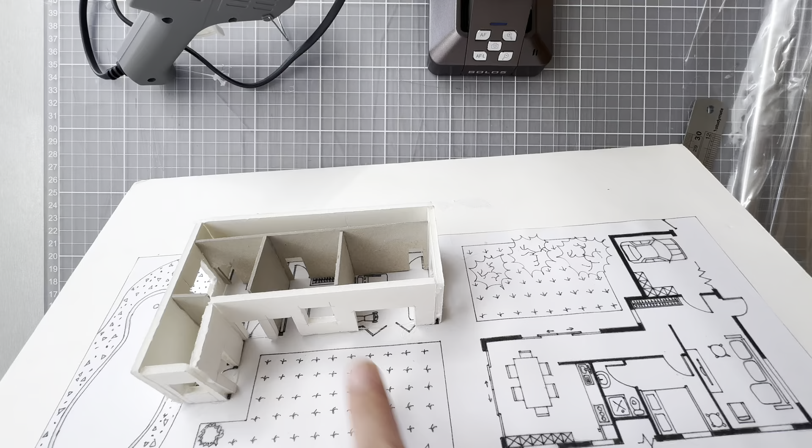This step is called adding details, or more specifically, adding the windows, the window Perspex on here. Let's say a window on it, okay?

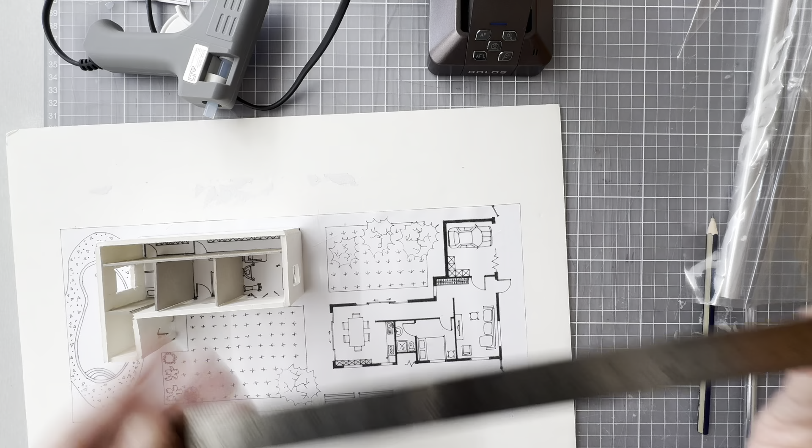The materials you're going to use today are first of all your finished model with the external and internal walls. You need a hot glue gun, make sure you plug it in so it preheats. I'll just lay it down because it cannot stand. You will need a metal ruler, a pencil, a knife, and most importantly, something called Perspex—these transparent pieces of plastic paper.

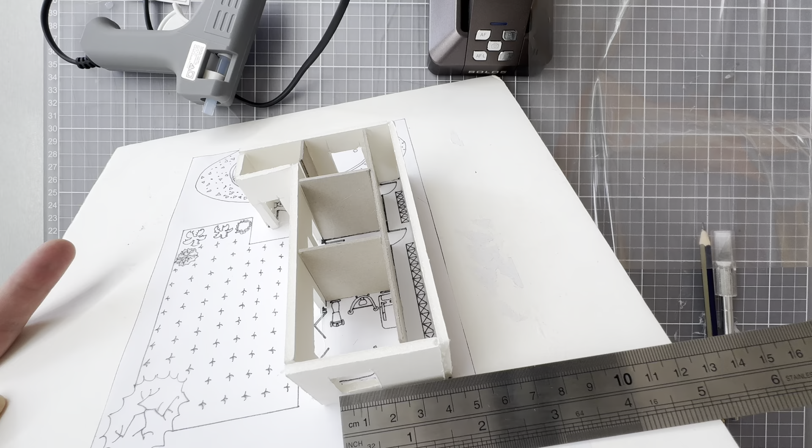First, we're going to measure how big your window is going to be. I'm going to use this window as a guide and measure it. Looks like this is 1.5 centimeters, and for the height, let's figure it out—looks like it's also 1.5.

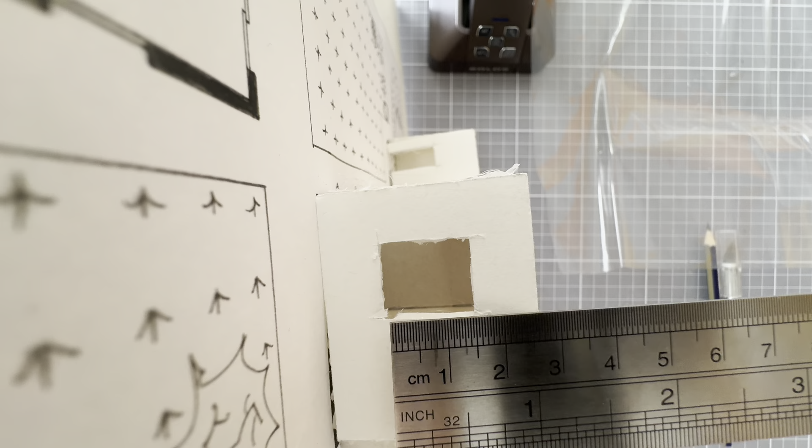So you're measuring how big a window is going to be, and then come over to this piece of Perspex. Now is a good time to use your cutting mat, because each of these little squares is 1 centimeter by 1 centimeter, so you don't technically need a ruler to measure.

Come here using this piece of Perspex, and make sure you're cutting a bit bigger. I'm going to cut in this square here, which is a 2 by 2, which will be a bit easier. I'll use a pencil to draw a mark, though you can't really see it.

I'm just going to come here and cut. If you can see it, I draw a little mark there, and I'm going to cut this piece of Perspex out. Just make sure that when you're cutting the Perspex, it's slightly bigger than your actual model.

Similar cutting technique—you cut through, make sure you cut a bit more, then you press and pull. This material is pretty easy to cut through, so it probably only takes one or two cuts. Then shift it towards this side, and let's do another cut.

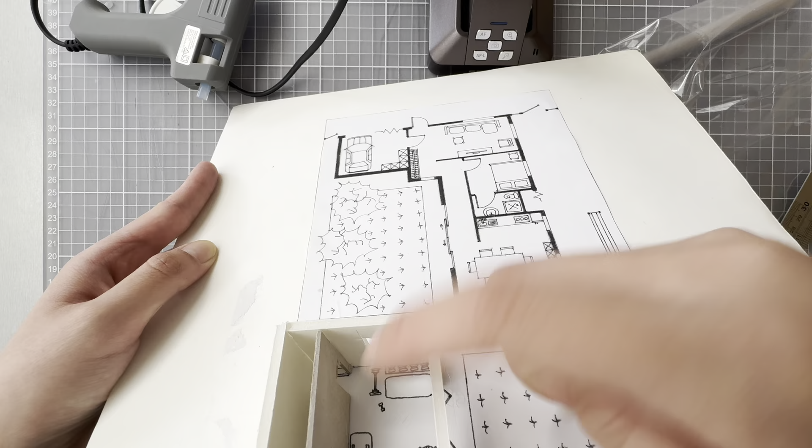Okay, one cut is off. Awesome, so we have this little piece of Perspex here. If you go on the inside of your model, not the outside, you slot it in here, and you'll see that it covers the whole window.

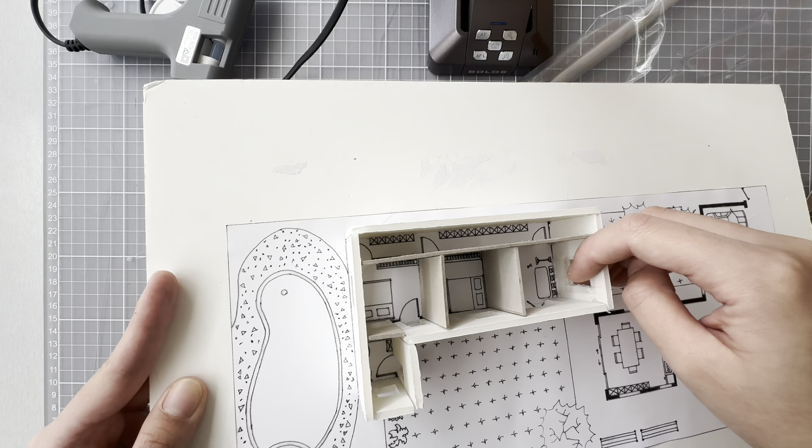Once you cover the whole window, grab your hot glue gun, which is hot, and make sure you attach the glue on top of the 4 corners. Just give it a bit of patience.

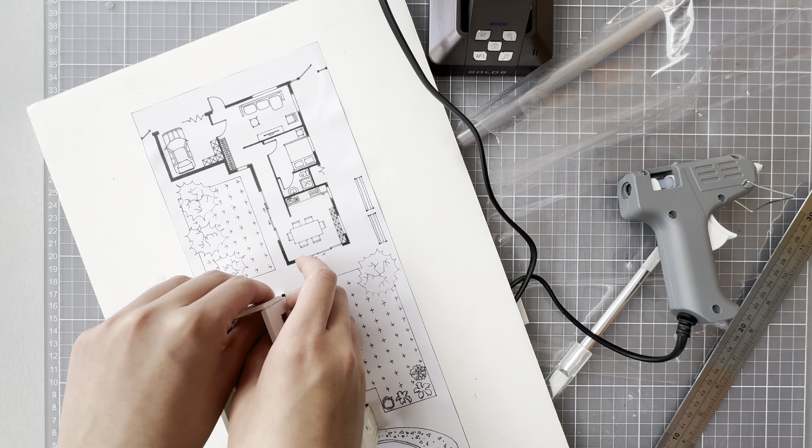Be careful of touching it. Now you can come over to your model and attach it on the inside of your walls—not on the outside, please.

Now you can see my window is attached over there. From the outside, you will have something called glazing—this is what I'm referring to. So you can have a full-size glazing over here.

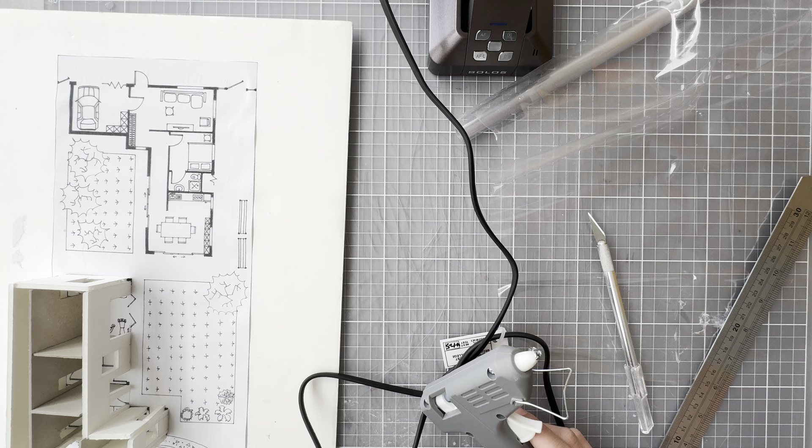Please note that this detail is not necessary for your models, okay? If you don't have them on your models, you won't lose any marks. This is just for you if you have interest in adding those details. But if your time isn't enough, just leave it and move on to the next step, which is the roof. Happy model making, I'll see you in the next one.